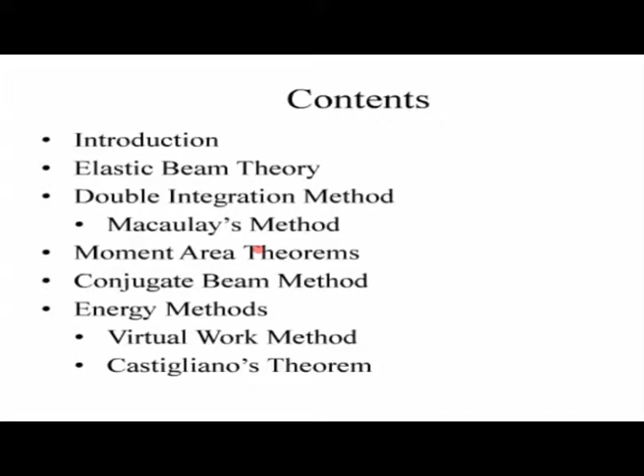Now, moving on with the introduction of this topic. First of all, why do we need to calculate structural deflections? Most often when we design structures, the first thing that comes into our mind is the strength of the structure, whether it is adequate. But in addition to paying attention to the strength of structures, it is also important to calculate the deflections.

There are various reasons for which deflections can occur in structures. Mainly, due to the loads, structures will deflect because no structure is practically or completely rigid. In addition to loads, deflections might be due to temperature changes in the structural members, fabrication errors, or settlement of the structural supports. These are the various reasons due to which a structure might undergo deflections. In order to ensure that our structure is stable and its integrity is maintained, we need to be able to calculate the deflections of these structures.

There are various other reasons for which we need to calculate deflections of structures. A number of structural materials, such as concrete, which are mostly used for civil engineering structures, are brittle, and hence they fail without giving much warning. Hence, it is necessary to prevent damage to these materials, and in order to do that, it is also necessary to calculate the deflection of such structures. Regarding serviceability, you need to avoid excessive deflections and vibrations in structures because it will render the occupants or users of those structures unsafe.

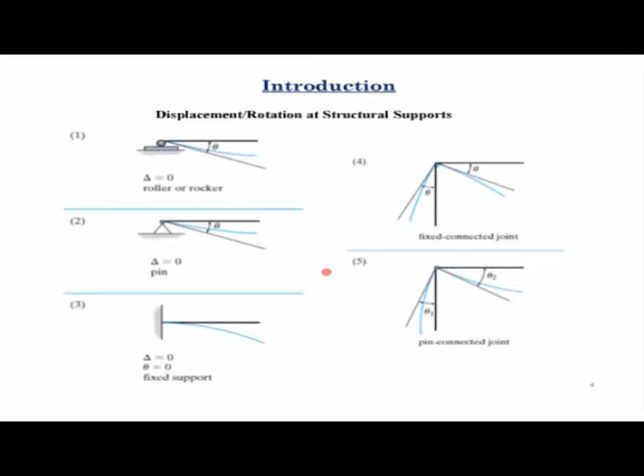Now, in order to calculate the deflections in structures, or displacement or rotations in structures, we need to be familiar with the various kinds of supports that these structures have. Some of the typical support conditions that are encountered in common civil engineering structures are shown on this slide.

The first one is like a roller or rocker support, which basically restrains the movement or displacement of the structure in only one direction, that is perpendicular to the support.

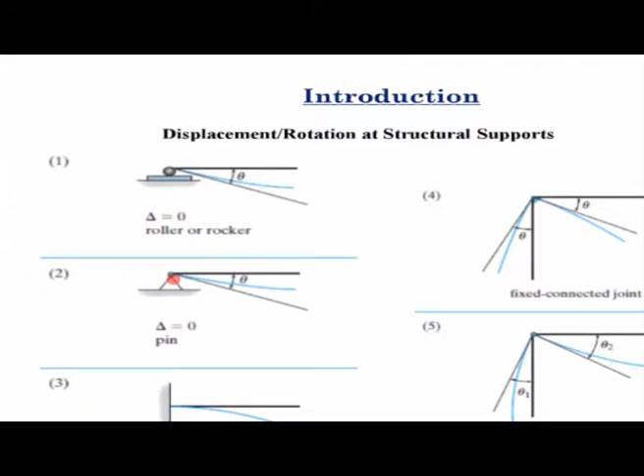The second one you see here on this slide is a pin support, which basically restrains the displacement of that structure at that point in all three directions.

The third support condition that we most commonly encounter in civil engineering structures is called a fixed support, which restrains the displacement as well as rotations at those supports.

And the fourth one you see here is a fixed joint connection, which is normally common in a frame member. In this fixed joint connection, the rotation of the two members which are connected at those joints are equal. In other words, the displacement at those joints or the rotation at those joints are allowed, but the rotations of those two members are equal.

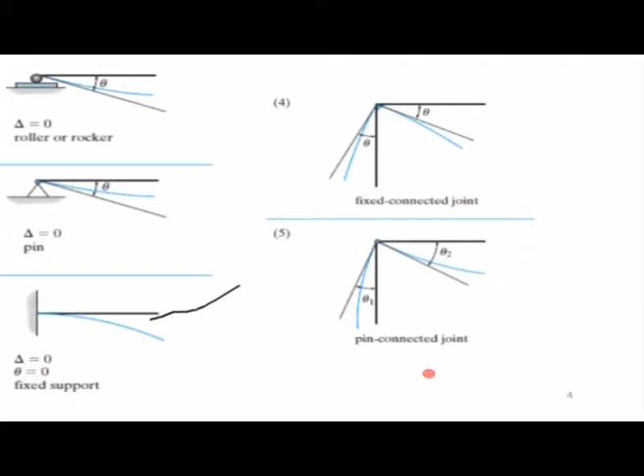Finally, the last connection that we encounter in civil engineering structures are the pin connected joints. In this kind of joint, the members are independent to move irrespective of the rotation or deformation of the other member. The two members which are connected are free to move by themselves.

Now, before I start with the first method of calculating deflection, I would like to give a small background about the elastic beam theory, based on which the first method, that is the double integration method, is developed. I'm sure that if you have taken any classes on strength of materials or solid mechanics, you have been familiar with this elastic beam theory, but I'll quickly recap.

However, it has been noticed that for members like structural beams, where the span to depth ratio is much higher, in other words the length is much greater than the depth, the deflections are primarily caused due to the bending internal forces, or the internal bending moments.

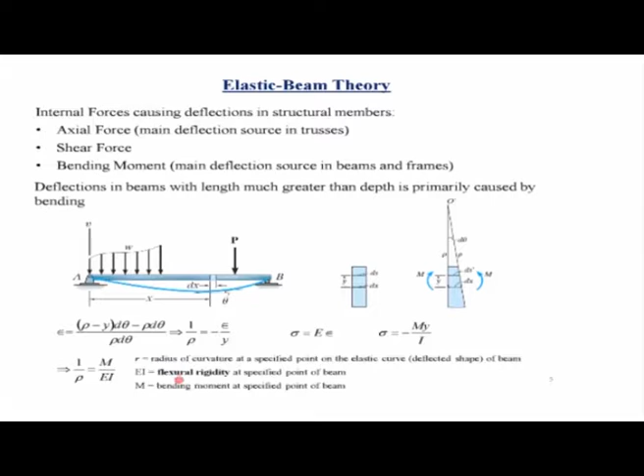Once again, looking back at that relationship, 1/rho equals M by EI. This dx is the length or width of that element, and that can be written as the radius of curvature times d theta. So here we have replaced 1/rho by d theta by dx, and taken dx to the other side, giving us d theta equals M over EI into dx.

Now if you remember from geometry learnt in class 12, the curvature is given by the second derivative of v with respect to x, over 1 plus dv/dx squared, whole to the power 3 by 2. In this study, we are considering small deformations, where dv/dx is basically the rotation of the beam element. For small rotations, dv/dx squared is much less than 1, so 1 plus dv/dx squared is almost equal to 1. So we can say 1/rho equals the second derivative of v with respect to x.

So when we substitute this here, instead of 1/rho, we write the second derivative of v with respect to x. We can say M by EI equals that second derivative. This basically relates the internal moment that develops due to applied loads with the deformation, that is the term v in this equation. Remember, this is the basic equation used to develop the three methods I'll discuss: the double integration method, the moment area theorem, and the conjugate beam method. In all three methods, this will be the starting point.

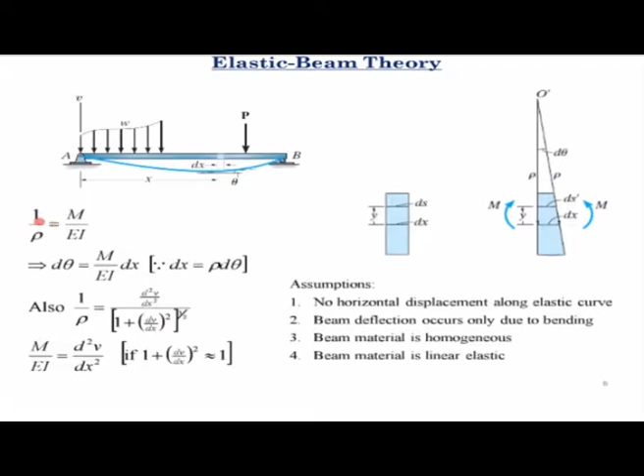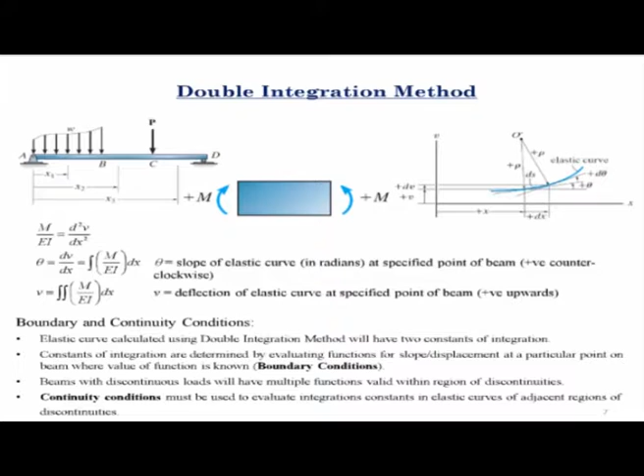So now we come to the double integration method, which is the first method for calculating deflection of structural members that I will discuss today. As I mentioned, the starting point is this second order deformation equation that we developed, that we saw in the previous slide: M by EI equals the second derivative of the displacement with respect to the distance along the length of the beam.

Now if you integrate both sides of this equation, you get dv/dx equals the integral of M by EI. Here dv/dx is the slope of the beam at any section. If you integrate both sides of this second equation, you get v. So integration of dv/dx is v, and you get the double integration of M by EI. This is the basic principle in this method, where you integrate the M by EI function of the beam twice to get the deflection and once to get the slope at any section. Theta is the slope of the elastic curve of the beam at any section, and v is the deflection.

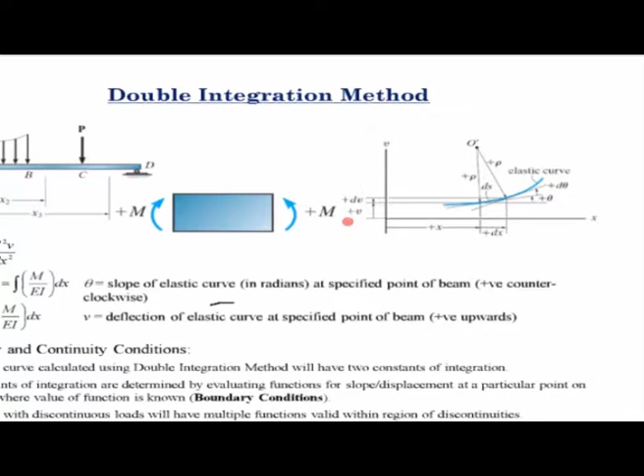Before I proceed further, I'd like to draw your attention to the sign convention we used for specifying theta and v. For the beam, we considered the distance towards the right as the positive x direction, and the deflection in the upward direction as the positive deflection v. For rotation, if it is counterclockwise, in other words if it's in the positive x direction and the deflection is towards positive v, then that rotation is considered positive. So this is the sign convention for positive rotation, and the vertically upward direction is the sign for positive deflection.

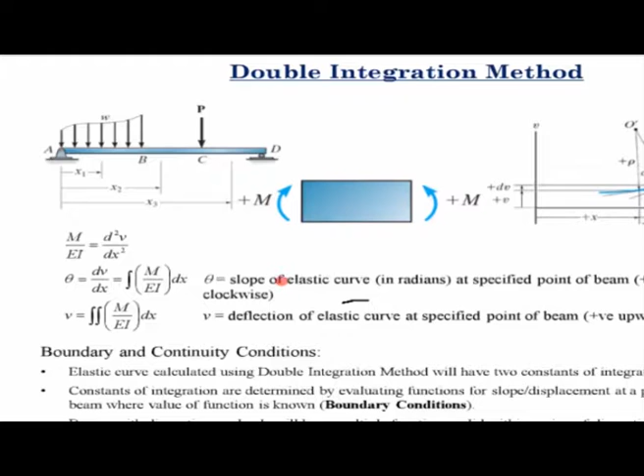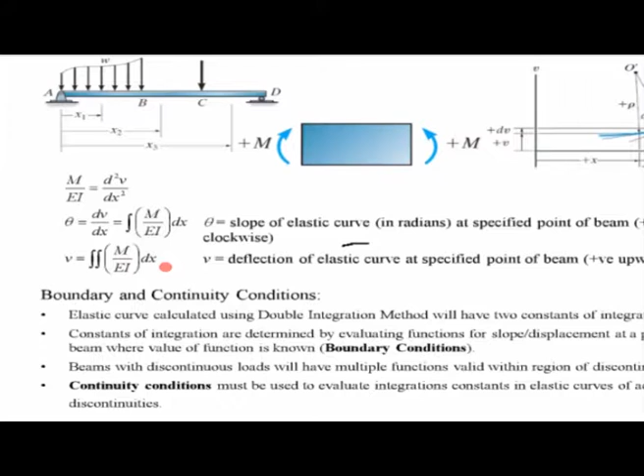Now coming back to the equation for this elastic curve, which is basically the deflected profile of the beam. We know that if we integrate the moment function of the beam, expressed in terms of x, where x is the distance from one end of the beam, what we get is some constant of integration on the right hand side. Those constants of integration have to be evaluated in order to calculate the deflection of the beam at any section, or to get the equation of that elastic curve.

So the elastic curve calculated using this double integration method will have two constants of integration. In order to determine these constants, we need to provide the values of either v or theta at some known points on the beam. In other words, those are known as the boundary conditions.

Beams with discontinuous loads will have multiple functions valid within the range of discontinuities, and the continuity conditions in that case must be used to evaluate the integration constants in the elastic curves of adjacent discontinuities. I'll have two examples which I'll show after this, and once we go through them, these points will be a lot more clear.

One of the prerequisites for this course was that the audience should be familiar with bending moment diagrams, shear force diagrams, and axial force diagrams of structures. So if any structure and any loading is given, you should be able to draw the bending moment, shear force, and axial force diagrams.

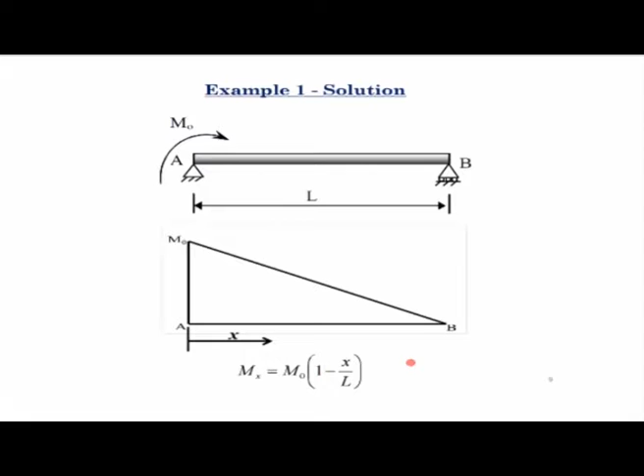Now in order to calculate the equation of the elastic curve, that is the displacement function of this beam at a distance x, using the double integration method, we write d²v/dx² = m/EI, and instead of m we replace it with m0(1 - x/L). If you integrate both sides of this equation, you get dv/dx on the left hand side, and on the right hand side you get (m0/EI)(x - x²/2L), plus a constant of integration c1.

If you integrate one more time, you get v = (m0/EI)(x²/2 - x³/6L) + c1x + c2. So these are the two constants of integration I was talking about in the previous slide. Whenever you try to get the deflection function of a beam using the double integration method, you will always encounter these constants of integration, which you have to solve using the boundary conditions.

Now for the boundary condition of this beam, it was a simply supported beam, so the deflections at both ends should be 0. At x equal to 0, the deflection v is equal to 0. If you put v equal to 0 at x equal to 0 into the last equation, you will get C2 is equal to 0.

The second boundary condition for this beam was at the other end, at end B, the deflection is 0. So at x equal to L, v is equal to 0. Come back to this equation, put x equal to L on the right hand side and set v equal to 0. If you solve it, you will get C1 is equal to minus m0L over 3EI.

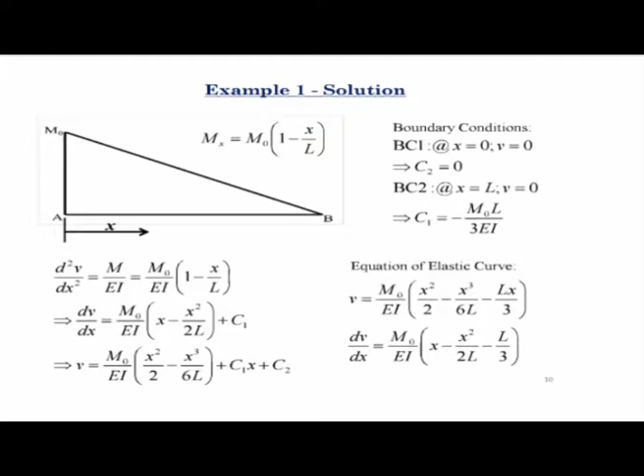So that is what we have done in this slide. In order to determine the location at which the maximum deflection occurs, obtain the value of x at which the first derivative of the elastic curve equation is equal to 0. Take this first derivative equation and equate it to 0, giving x minus x squared by 2L minus L by 3 equal to 0. This is a quadratic equation, and solving it gives two values of x: one is x equal to 0.422L and the other is 1.56L.

That value of x must be within the range of 0 to L, so x cannot be 1.56L. In other words, this equation for the elastic curve will have either a maximum or minimum value at 1.56L, but for this problem it is not applicable because it is not within the range of applicable values of x. So x equal to 0.422L is the location at which the maximum deflection will occur.

Next, you have to obtain the maximum deflection. Come back to the deflection equation and put x equal to 0.422L into it. If you solve it, you end up with minus 0.064 m0L squared by EI. This minus sign indicates that this is in the vertical downward direction. Remember the sign convention for deflection: deflection in the vertically upward direction is positive. So once it comes out negative, that means it is in the vertically downward direction. That is about the maximum deflection of the beam.

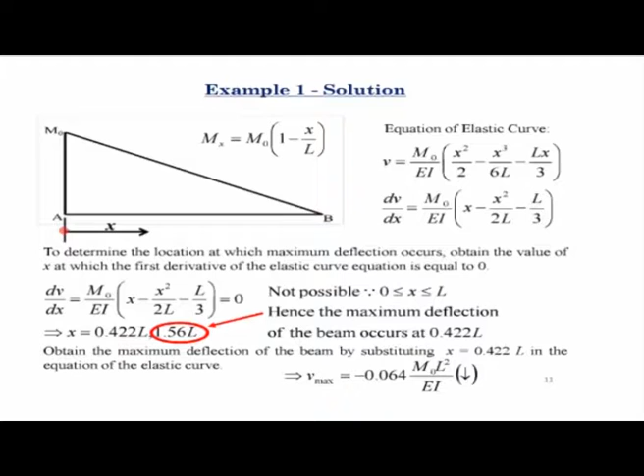It is minus 0.064 m0 L square by EI. So minus indicates it's in the downward direction, and this maximum deflection will occur at a distance of 0.422 L from the left end of the beam.

Now for the maximum slope, what we do is we take the derivative of this dv/dx, we take the double derivative, so it is d2v/dx square. If you equate that second derivative to 0, you will get x is equal to L. Now if you put x equal to L in this equation, you get the slope is m0 L by 6EI. So that is the slope at the beam at x equal to L.

But there is one thing that you should be careful about, which I will now talk about: this is one of the drawbacks of the double integration method. You always cannot take the higher order derivative and equate it to 0 and get the location of the maximum slope or deflection. In this case, what you get is a positive rotation at the right end, that is at x equal to L, and that is m0 L by 6EI.

However, if you come back to this equation for the slope of the beam, which is dv/dx equal to m0 by EI times x minus x square by 2L minus L by 3, and in this equation, if you put x equal to 0, that means at the end A of the beam, you will see that dv/dx at x equal to 0 is minus m0 L by 3EI.

So what does this indicate? This indicates that at this end, it is having a negative slope, that means it is in the clockwise direction at this end. And notice that the magnitude of this slope at the left end is higher than the magnitude of the slope at the right end. So this is basically to remind you, or to show you, that you should always calculate the deflection at the support condition in addition to the deflections or rotations that you get from the equation of the elastic curve.

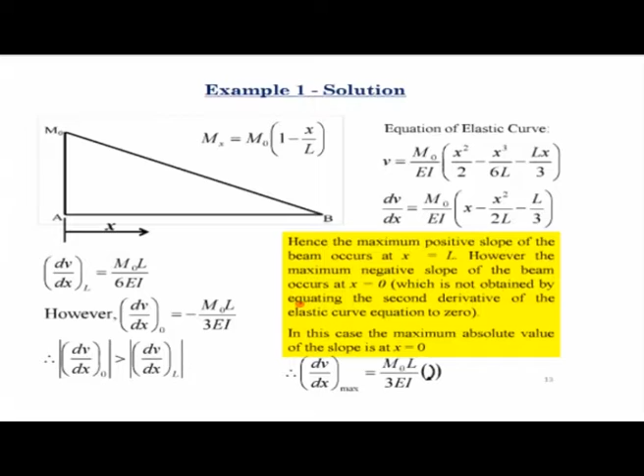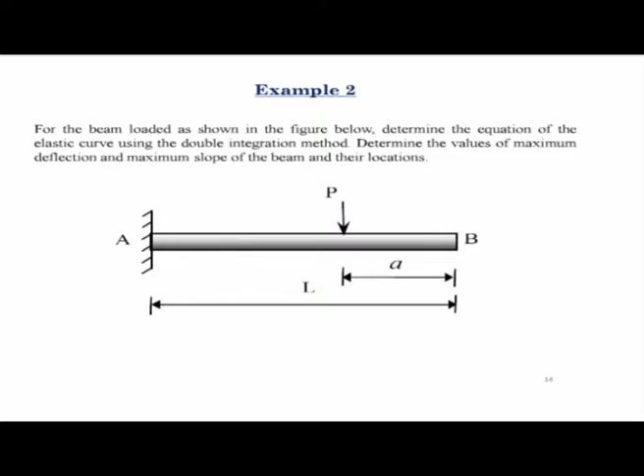Now in this case, you see that if you draw the bending moment diagram of the beam, this is what it will look like. At the fixed end, the moment is minus P times L minus A. And at a distance of L minus A from the left end, the moment is 0. Beyond that, the moment remains constant. So this is the bending moment diagram.

So now here notice that the bending moment, if you write the moment function, it will have two equations. For x between 0 to L minus A, it is minus P times L minus A minus x. And when x is greater than L minus A and less than L, the moment is equal to 0.

Now, to solve for the elastic curve of this beam using the double integration method, there are two sets of moment functions that we have to consider. One is valid for x greater than 0 and less than L minus A, and the other one for x greater than L minus A and less than L.

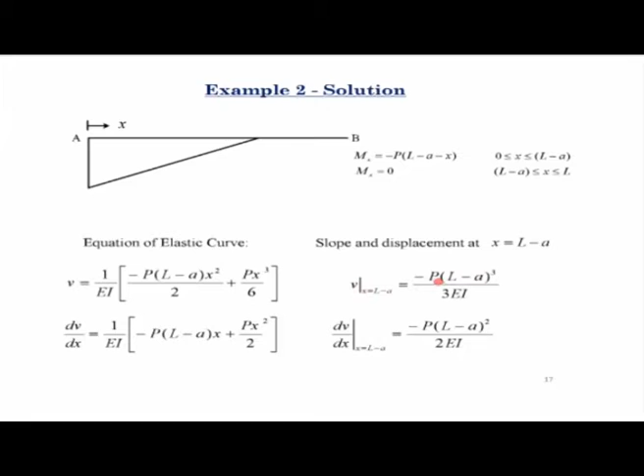And also at x is equal to L minus a, the deflection is minus P(L minus a) cube by 3EI. So these are the two boundary conditions that we are using to solve the constants of integration for the second part of the beam.

So if you put those constants of integration back into the equation, you will get v is equal to, instead of c1, minus P(L minus A) square by 2EI times x, plus c2 which is P into (L minus A) whole cube by 6EI.

And also the slope of the elastic curve of that beam is given as dV/dx equals C1. So C1 is minus P(L-A) squared by 2EI. This is the equation of the slope and deflection for this portion of the beam.

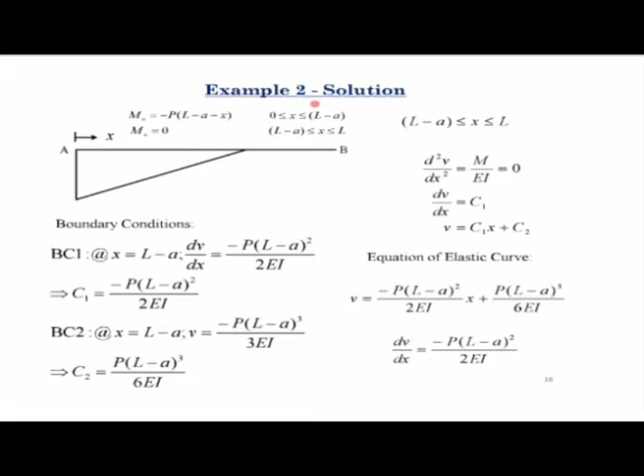This slide summarizes the slope and deflection equations for both regions of the beam. This is for the first part, between 0 and L-A, and this is for the second part. These are also the equations for the slope of the beam, one for x between 0 and L-A, and the other for x between L-A and L.

Now in this problem we also had to calculate the maximum slope and maximum deflection of the beam. Looking at the slope and deflection expressions for x between 0 and L-A, both contain terms of x. So if x is 0, the deflection is 0, and the slope is 0. As x increases, the deflection and slope keep increasing, so this gives the maximum value of slope and deflection at x equals L-A from these two equations. Now coming to the other two equations,

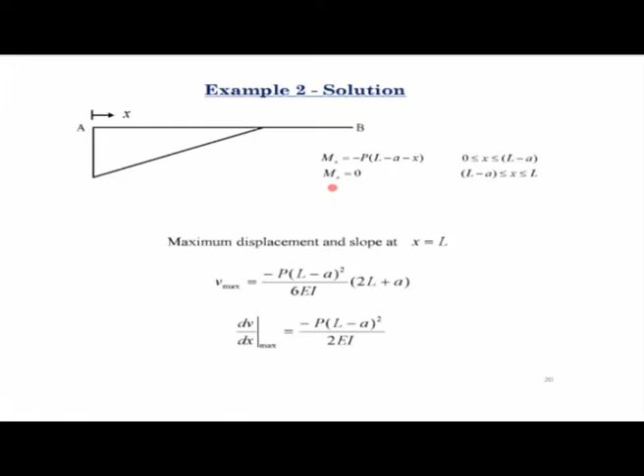Based on our observations from these two examples, I have highlighted some points about the double integration method that I want you to keep in mind. First, the double integration method can be used to directly obtain the slope and deflection at any point along the span of a beam from the equation of its elastic curve. So if you have the moment function of a beam along its span, you can use it to calculate the slope or deflection at any point by the double integration method.

However, there are some drawbacks, which I mentioned and will highlight again. Beams with discontinuous loads will have separate moment functions applicable to individual regions of discontinuity. We saw in the second example that even though there was no moment function for the region of the beam between L-A and L, we had to consider a separate set of equations and find two separate constants of integration in order to get the equation of the elastic curve for the entire beam.

Continuity conditions must be used to evaluate integration constants in elastic curves of adjacent regions. Recall the second example: we first found the equation of the elastic curve for the region from x equal to 0 to L minus A, then used that equation to obtain the slope and deflection of the beam at x equal to L minus A, which served as boundary conditions for the equation of the elastic curve between L minus A and L.

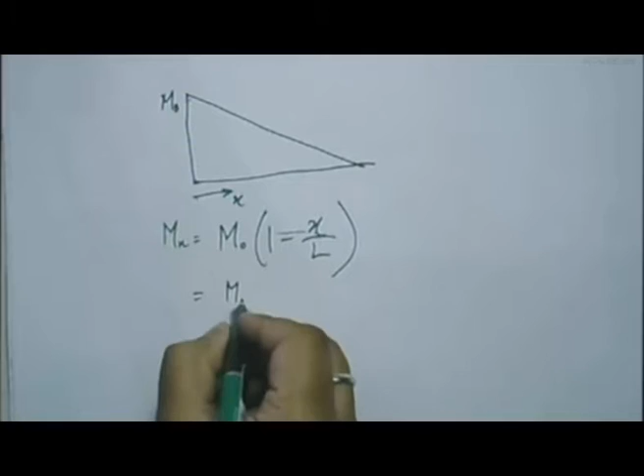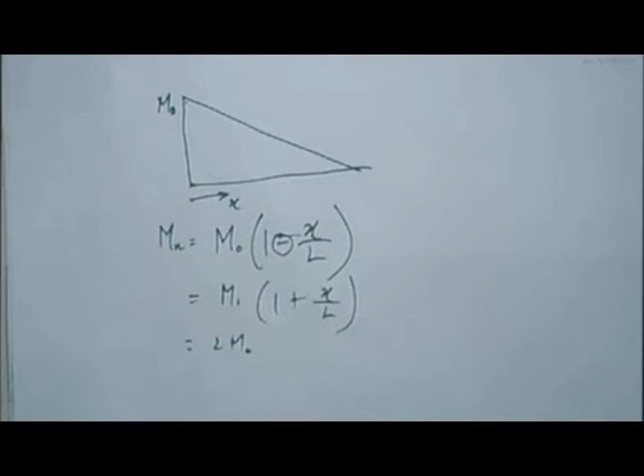Sir, in example number 1, we have m(x) equal to m0(1 minus x/L), but when I solve it I get m0(1 plus x/L). Why is there a minus sign? If you look at the bending moment diagram of that beam: this is x, and at x equal to 0, the value of the moment is m0. The equation I got is m(x) equal to m0(1 minus x/L). At x equal to L, the value of moment is 0 — if you put x equal to L, you get 1, so 1 minus 1 makes it equal to 0. Now if you say it is m0(1 plus x/L), then at x equal to L you would get 2m0, but it's basically reducing, it's negative — that's why you should have the negative sign there. Is that clear? Yes sir, I got the answer, thank you.

Another question through the chat asks why we assume the beam is linearly elastic. The reason is that if we do not assume the beam to be linearly elastic, then in the equation d2v/dx2 equal to M/EI, the E term is not constant. So if the beam is not assumed linearly elastic, that equation, which is the basis of our method, is not applicable. That is the main reason this method is applicable for linearly elastic materials or beams.

There's another question asking how to find slope and deflection for continuous beams. Before starting this lecture, I mentioned this method is for statically determinate beams. So if you have a continuous beam which is statically determinate, and there is a support somewhere in between the span, you simply apply the support conditions at that point into the equation of the elastic curve to evaluate the constant of integration. At the point where the boundary condition is imposed, apply it into the equation of the elastic curve, and you should be able to solve for the deflection and slope of that beam even though it is continuous.

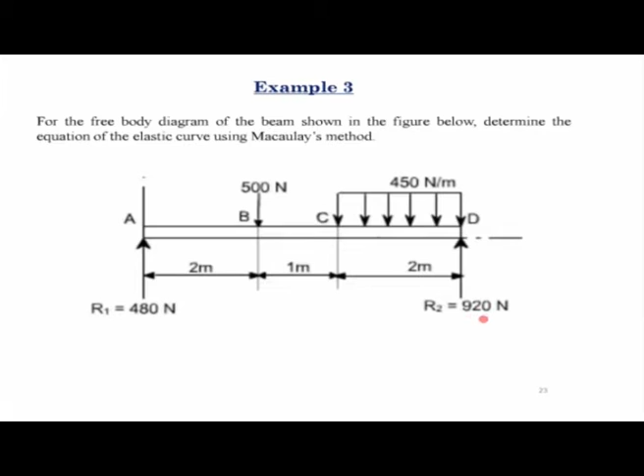Now, if you want to write the moment function for this beam, it has load discontinuities at point B and C. So what happens is, between A and B, there is one equation for the moment function.

So for x between 0 to 2 meters, the moment function is given by the reaction 480 times x. For this region between B and C, that is for x greater than 2 and less than 3, the moment function is given as 480x minus 500 times x minus 2. So that concentrated load, which is at a distance of 2, comes into the picture here for the moment equation between B and C.

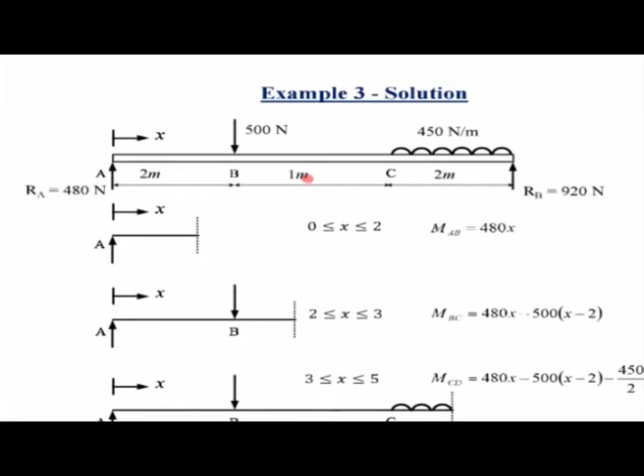Now, if you look at the third region, that is between C and D, the moment function is given as 480x minus 500 times x minus 2 minus 450 by 2 times x minus 3 whole square. So now in this region, even the uniformly distributed load of 450 Newton per meter comes into the picture.

So now you see that if you want to solve this by the regular double integration method, you will have 3 different sets of moment equations. You will have 6 constants of integration that you have to evaluate in order to be able to obtain the elastic curve of this beam.

So now what we'll do is we'll see how we can solve it much easier using the step or singularity functions by the Macaulay's method. This is the equation of that beam. The second order equation of the elastic curve of the beam can be written as a single equation using the singularity functions as shown below.

So instead of, if you go back, for this region it is 480x, but for this region it is minus 500 times x minus 2. Now if you put this in box brackets, or if you use singularity functions, then you can use this second term in the same equation.

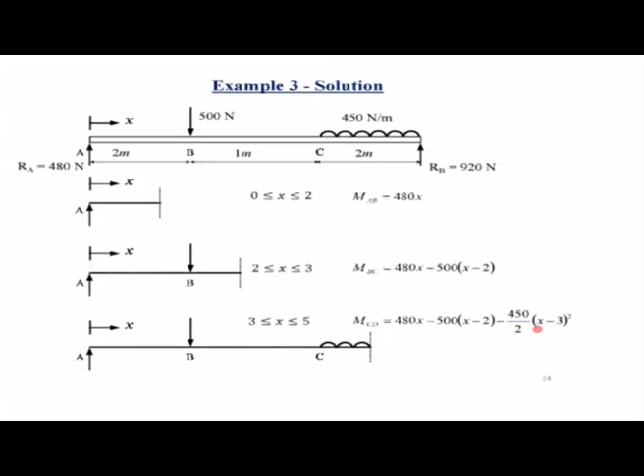Similarly, if you put this x minus 3 within the box bracket, that means when x is less than 3, this term becomes 0. When x is greater than 3, then it is applicable. So that is what we do here. We use the singularity functions to express the moment equation of that beam, and then we put it in the second order equation of the elastic curve.

So EI d2v dx square is equal to 480x minus 500 times x minus 2, this is a singularity function, minus 450 by 2 into x minus 3 whole square, again this is a singularity function.

Now, if you look at the properties of integration of singularity functions, and if you integrate on both sides, you will get EI dv dx is equal to 240 x square minus 250 times x minus 2 whole square. So now notice, if you integrate this singularity function, you get x minus 2 whole square by 2, so that 2 is cancelling this 500, and you get 250.

Same thing here, 450 by 2 times x minus 3 whole cube by 3, so that 3 and 2 in the denominator cancel this out and you get 75. So this is the first order equation of the elastic curve.

EI dv dx is equal to 240 x square minus 250 times x minus 2 square within this singularity function, and minus 75 times x minus 3 cube, plus, again like we do in the double integration method, we also have a constant of integration C1 here.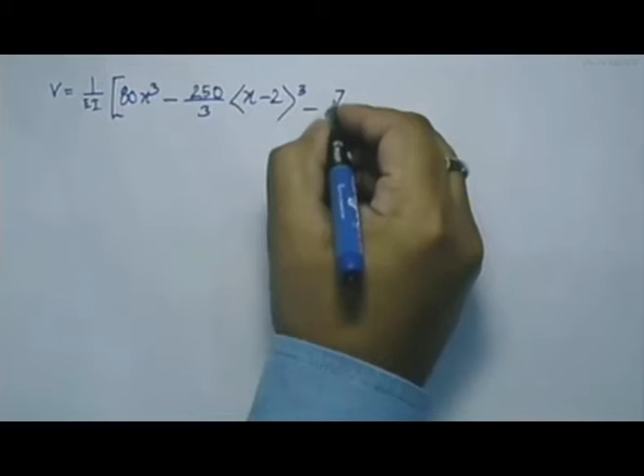80x cube minus 250 by 3, the singularity function of x minus 2 whole cube, minus 75 by 4, singularity function of x minus 3 to the power 4, minus 1490. So this is the equation of the elastic curve using the singularity function.

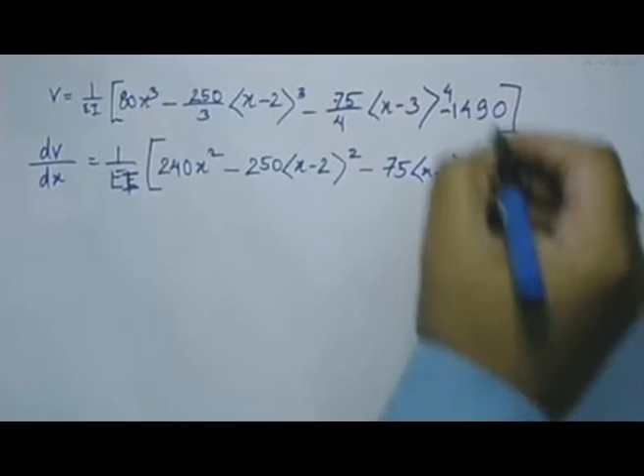Now if I want to calculate the maximum deflection of that beam, I can say dv/dx, which is equal to 1 by EI, this will become 240 x square minus 250, x minus 2 whole square, minus 75, x minus 3 to the power... I'm sorry, there should be an x here, C1x minus 1490.

Now if you straight away equate this to 0, what happens to these singularity functions? You cannot just ignore them or use them directly for calculating the values of x. So what we have to do is, just like in the double integration method, we have to separate it into 3 different regions.

So for x between 0 to 2 meters, the dv/dx will be 1 by EI, 240x square minus 1490. Now you equate this to 0 to get the location of the maximum deflection.

If you equate this to 0, you will get x is equal to 2.49 meters. Now, notice that this part of the equation I wrote is valid for x between 0 to 2, and by solving this, you are getting x is equal to 2.49. So it is not applicable at x equal to 2.49.

So the maximum value of the deflection cannot be obtained at x equal to 2.49. In other words, the maximum value of the deflection does not occur between x equal to 0 and x equal to 2. So now what we do is we take the second equation.

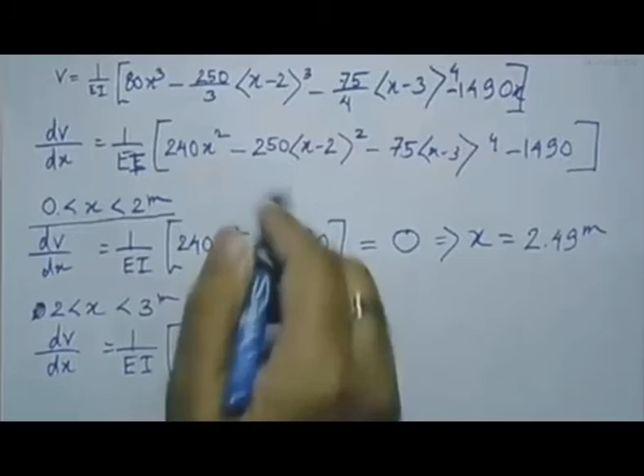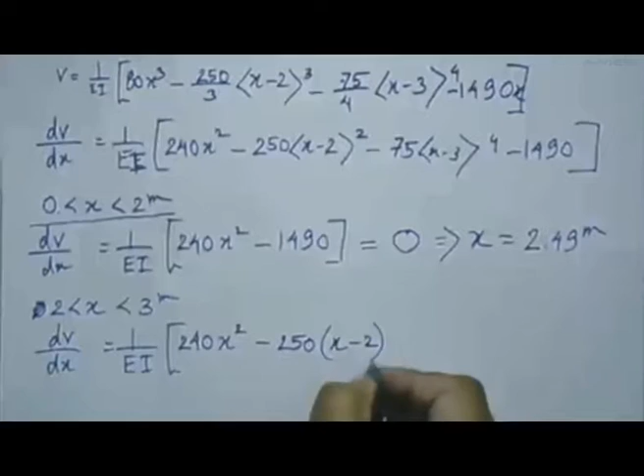So for x between 2 meters and 3 meters, dv/dx can be written as 1 by EI times 240x squared. Now the second term will come into the picture, minus 250 times x minus 2 whole square. Since x is greater than 2, you can write it using the round bracket. Minus 1490, this term is still not applicable, it's only applicable for x greater than 3, but right now x is between 2 and 3.

Now if you put this equal to 0, you will get a quadratic equation. If you expand the x minus 2 whole square and rewrite it, you will get 1 by EI times minus 10x squared plus 1000x minus 2490 equal to 0. If you solve this, you will end up with two values of x. This is a quadratic equation, so solving it gives two values of x.

I have already solved it for your convenience. You get x equal to 2.55 meters and 99.5 meters. The second value is not applicable because for this equation, the limits of application are between x equal to 2 and x equal to 3. The first solution, x equal to 2.55 meters, is between 2 and 3, so this solution is applicable in this equation.

So to calculate the maximum value of v, you put x equal to 2.55 meters into the equation and solve it, you will end up with minus 2487 by EI. So this is one of the maximum values of the deflection. Here you are getting a negative value, which tells you that the maximum deflection is in the downward direction.

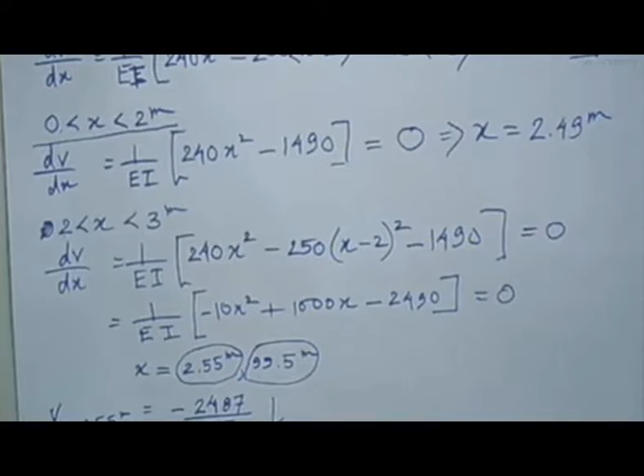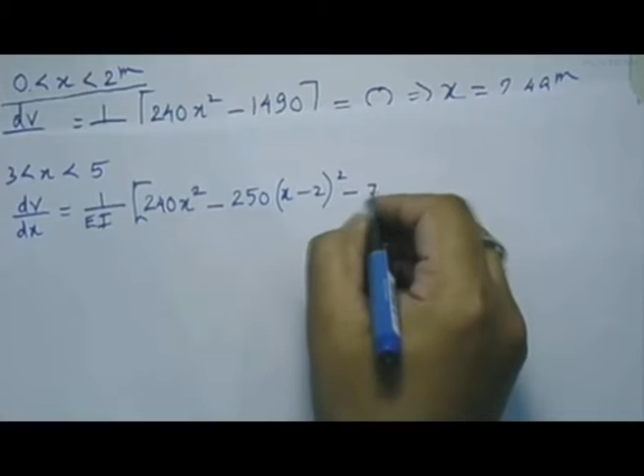Now this is the second set of equations. There will be another, third set of equations valid for x greater than 3, less than 5, and for that the equation will be dv/dx equal to 1 by EI times 240x squared minus 250 times x minus 2 whole square minus 75 times x minus 3 to the power 4, minus 1490. Notice that even the singularity function at x equal to 2 and the singularity function at x equal to 3 both come into the equation, and both have been replaced by round brackets.

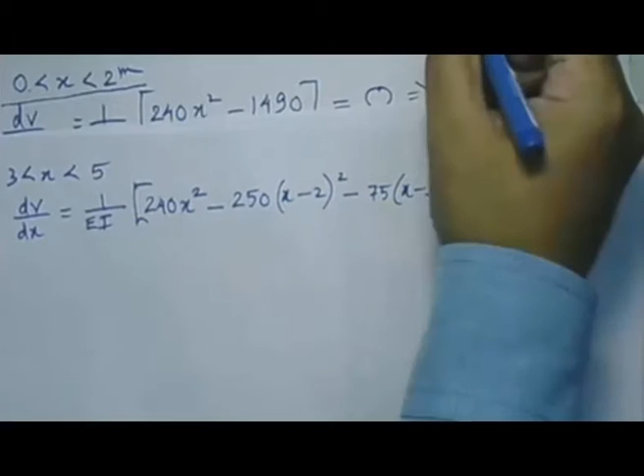So if you equate this to 0, this is a cubic equation. Sorry, this should be a cubic equation. So if you solve this, you will get three values of x. The values you get here are minus 0.36 meters, 2.54 meters, and 6.68 meters.

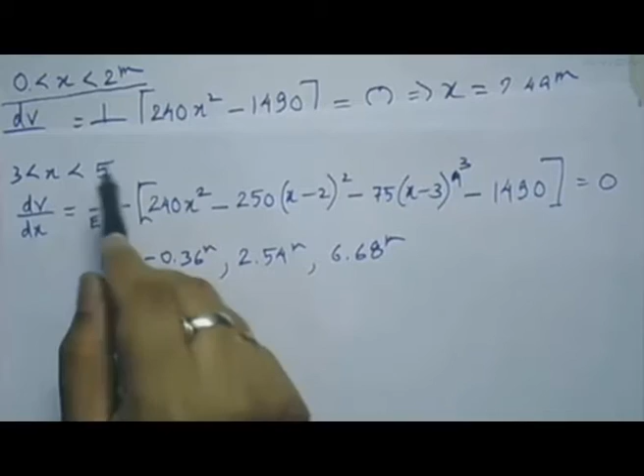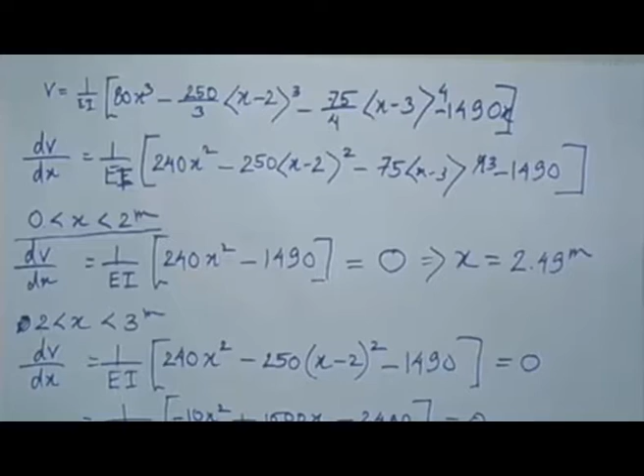So this is one example that I wanted to discuss with you all, to show one of the limitations. Even if you are able to obtain the equation of the elastic curve, that is the slope equation and the deflection equation, by solving a single equation, if you have to calculate the maximum slope or the maximum deflection of the beam using this method, you will have to again consider the separate equations which are applicable for each region of continuous loading, just like you do in the double integration method.

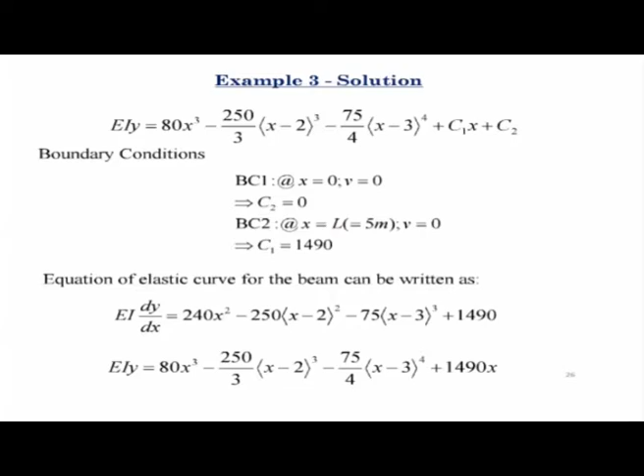So these are some of the highlights of Macaulay's method. First, it is used to directly obtain the equation of the elastic curve of a beam with discontinuous loads by using a single moment equation with singularity functions. Just like you saw in the example, if you had solved that example number 3 using the direct integration method, you would have solved 3 different sets of equations and 6 constants of integration. But because you solved it using Macaulay's method, you just had to solve only one equation and 2 constants of integration. So it is definitely more convenient for calculating slope or deflection at any point over the span of a beam with discontinuous loads.

However, evaluation of maximum slope or deflection from the equation of the elastic curve requires consideration of separate equations without singularity functions. So if you looked at that example I showed, and how to calculate the maximum deflection of that beam, for that you again have to consider the 3 separate regions: one between x equal to 0 to 2, the other between 2 to 3, and the last one for 3 to 5.

Now again, just like the double integration method, this is not applicable for calculating slope or deflection of beams with complicated loading and support conditions, and also it is not applicable for members having significant deformations due to axial and shear forces. So that is all I had to present about Macaulay's method.

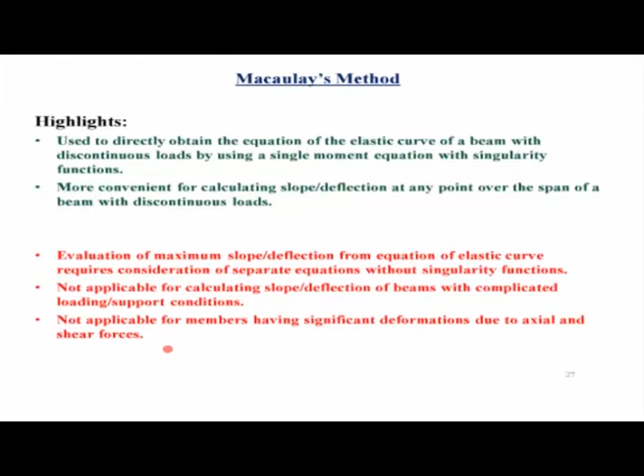Now if you all have any questions about Macaulay's method, I would like to take them right now.

Okay, I got a question here: which method is feasible to find slope and deflections for nonlinear elastic and inelastic structures? If you are dealing with nonlinear elastic and inelastic structures, this direct integration method may not be applicable or may not be convenient to use. The best option I can think of is to use some finite element analysis, which might be helpful for solving slope and deflection of structures with inelastic components.

When there is STAAD.Pro, why are we using these traditional methods? Which one is more accurate?

Okay, now this is a good question. When there is STAAD.Pro, why are we using these traditional methods? This is just to make you all familiar with the theories, because if you get a software, it is always convenient to use, but at the same time, it is also important for you to be familiar with the theoretical knowledge used to develop these softwares. Otherwise, if you make some mistakes while using a software, it will be very difficult for you to figure out the reason why. So using a software is always welcome and encouraged. You should be familiar with different kinds of software, but also familiar with the basics behind them. If you are not familiar with those basics, you might be using the software as a black box.

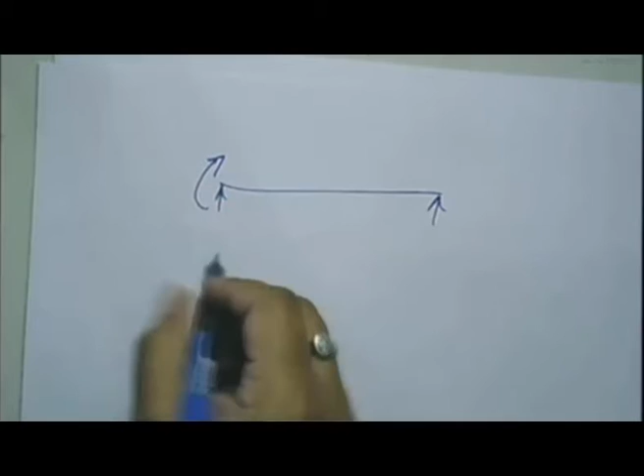If a moment is acting at a support, how do you use Macaulay's method to find slope and deflection? First you find the moment function of the beam. If you look at the first example I talked about, where I had a moment acting at the support, and you draw the moment diagram of that beam, the moment function is continuous—there is no discontinuity. So in this case, you don't even need Macaulay's method. You just find the moment function or moment equation over the length of the beam and directly use it in the double integration method. You don't need Macaulay's method for this beam.

The next question is why Macaulay's method cannot be used for member deformation due to axial force and shear load. The basic principle behind Macaulay's method or double integration method is elastic beam theory, which considers the deformation of members due to bending moment, but does not consider deformation due to axial force and shear load. That is why Macaulay's method or double integration method cannot be used for calculating member deformation due to axial load and shear forces.

The next question is, can we predict directly the approximate place of maximum deflection without going through all those individual sections? I'm not sure if you're asking about the example that I discussed.

If it is about example 3 that I was talking about, yes, we can look at the beam and definitely say that the maximum deflection would be somewhere near that concentrated load. But to find the exact location and the value of that maximum deflection, we need to go through the exercise where you take the first derivative, equate it to 0, find the location, and put that location back into the equation of the elastic curve to get the maximum deflection.

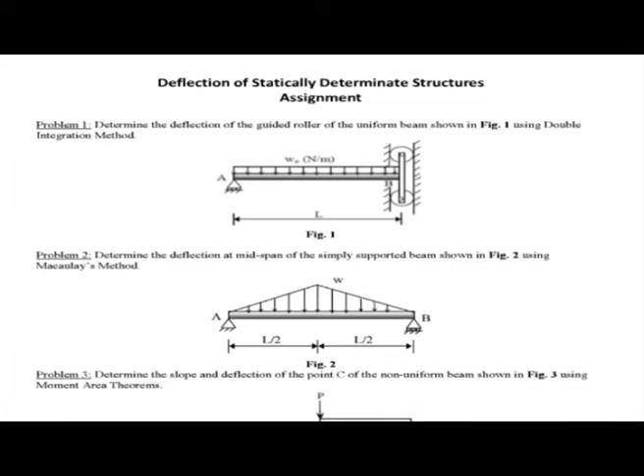So these are some of the assignment problems I gave for this lecture. The first one is a double integration method problem. What I have here is a beam with a pin support at one end, and a support at end B which is fixed but not restrained in the vertical direction—there are rollers by which the beam can move vertically at end B. I won't be doing the detailed solution of this problem.

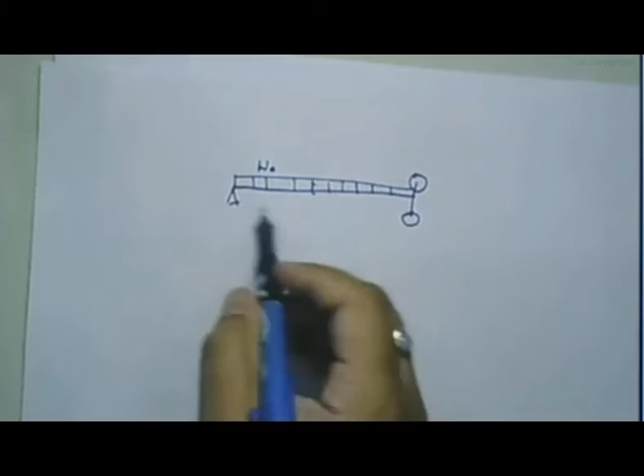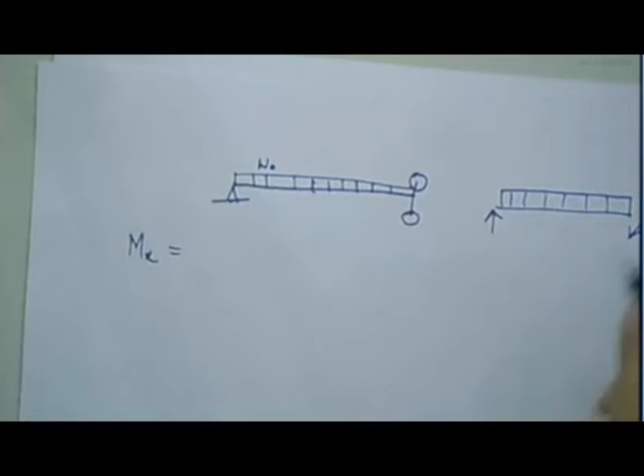If this beam is subjected to a uniformly distributed load w0, there is no discontinuity in loading, so we can easily use the double integration method. To write the equation of the moment function, first you should draw the free body diagram. If you draw the free body diagram, you'll get a reaction here and a moment. This is w0, and this is the length of the beam.

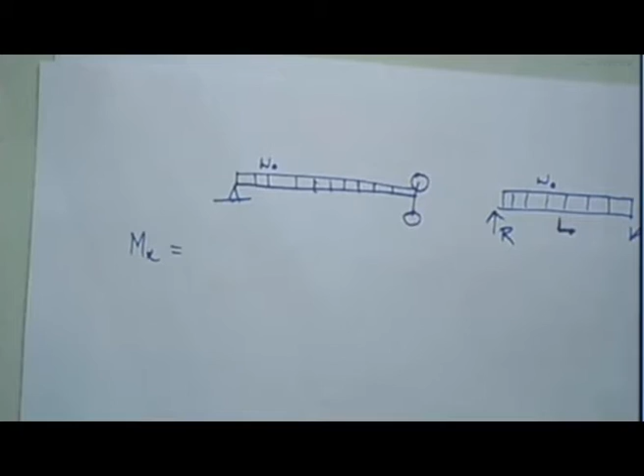So if you apply the equation of static equilibrium to this beam, summation of vertical forces equal to 0, you'll be able to solve for the reaction, which will be equal to omega 0 L, and the moment would be equal to omega 0 L squared by 2.

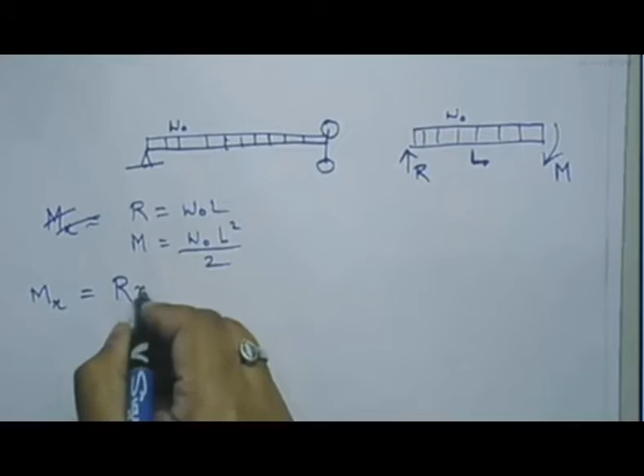Now, to solve this beam using the double integration method, you have to write the moment function. For that, it will be R times x minus omega 0 x squared by 2. So this is the moment function that you have to use.

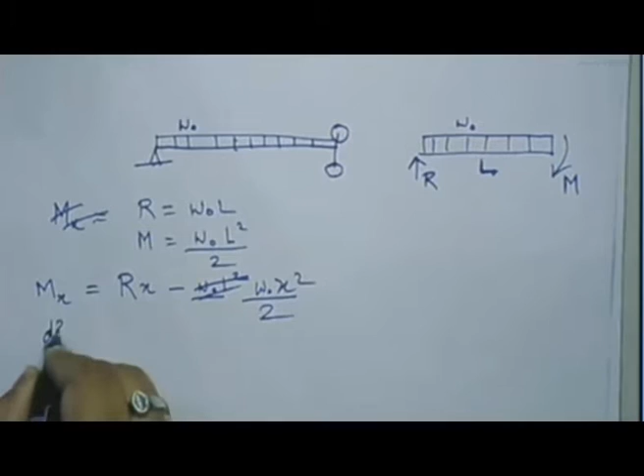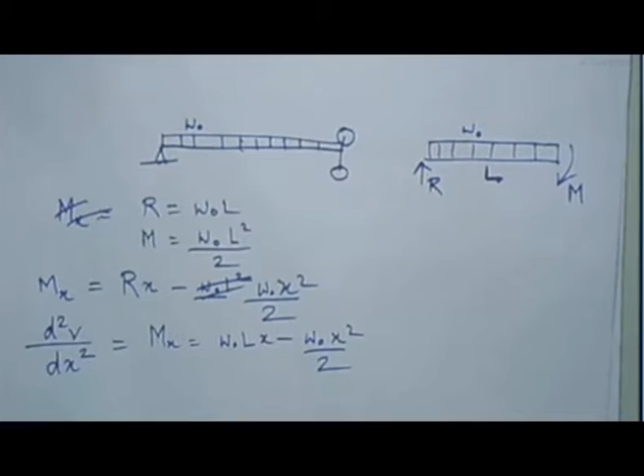Now you do the double integration, so you write d2v/dx squared is equal to Mx. In this case, it is omega 0 L x minus omega 0 x squared by 2. Now you can use the double integration method to get the expression—and what we've missed here is 1 by EI.

If you solve for this, you'll get some expression in x, and two constants of integration, C1 and C2. How do you solve for C1 and C2? What are the boundary conditions in this beam? The boundary condition would be at x equal to 0, V is equal to 0, because it's a roller support at the left end. And the second boundary condition would be at x equal to L, the slope of the beam would be 0.

If you look at this beam, here it can move vertically, but it is fixed into this rod. So because of that, it will not have any rotation at this end. So it will be dV/dx equal to 0.

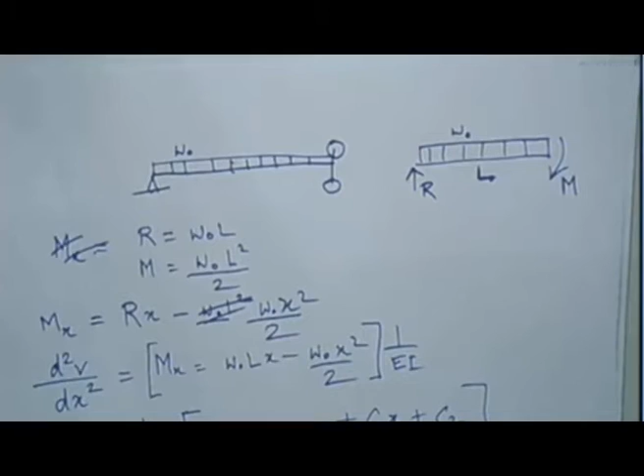Once you get these two boundary conditions and apply them into the equation of the elastic curve, you will be able to calculate these two constants of integration, and thereby get the equation of the elastic curve. So this is the first problem of the assignment.

So that was the first problem. Now there is the second problem in the assignment, which also answers a question some of you had: determine the deflection at the midpoint of the simply supported beam using Macaulay's method.

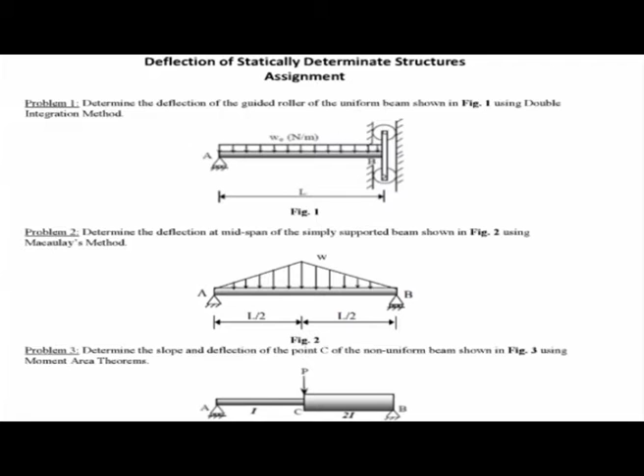You have a uniformly increasing load, going from 0 up to W at the center of the beam, and then it decreases again. So the question someone asked was, what do we do if we have a uniformly increasing load?

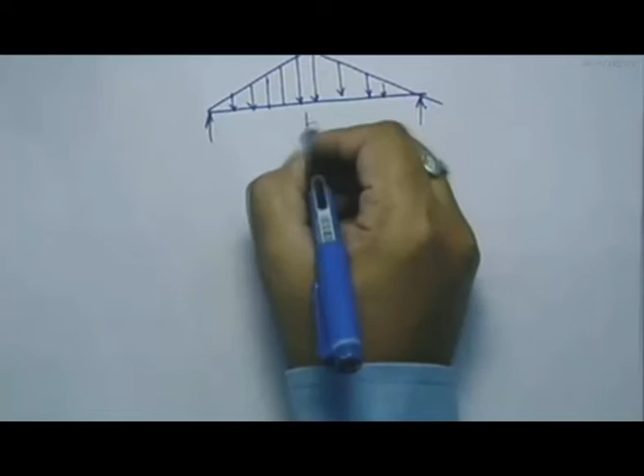So this is the uniformly increasing load. First, you have to calculate the reaction. If the length is L, the total load on the beam is half of omega times L, so the reaction at each support would be omega L by 4.

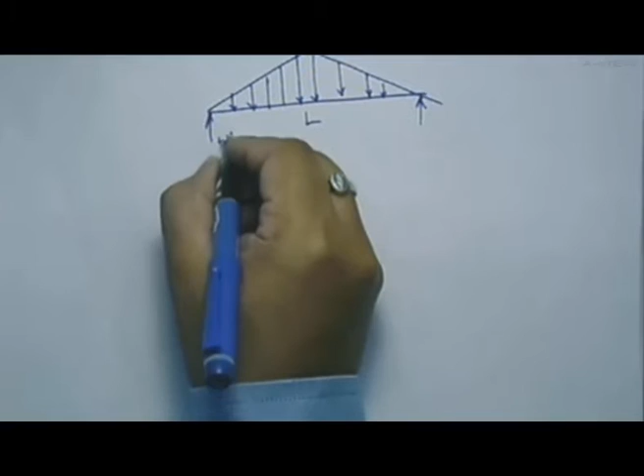To write the equation of the moment function, it will be omega L by 4 x minus omega by L by 2 into x. At a distance x, this value is omega by L by 2 into x, so this into half into x into 1/3 x. This equation is valid for x between 0 to L by 2.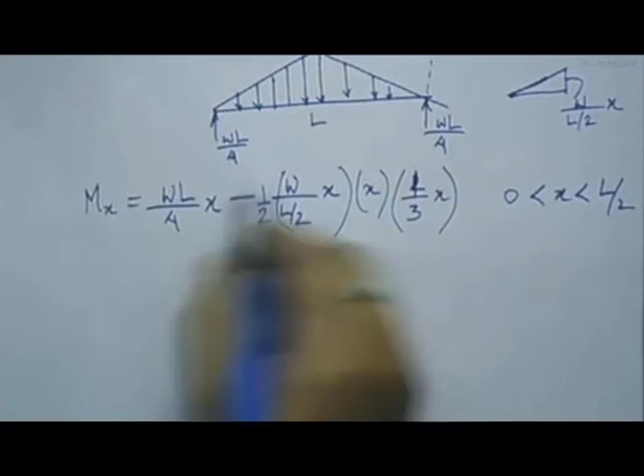If it had increased continuously over the entire span of the beam, this equation would have been applicable for the whole beam. So that basically answers the question: if it were a uniformly increasing load, this equation would be valid for the entire beam.

Now since there is a change in the slope of the loading, going from uniformly increasing to uniformly decreasing, we have to use Macaulay's function. How do we apply Macaulay's function?

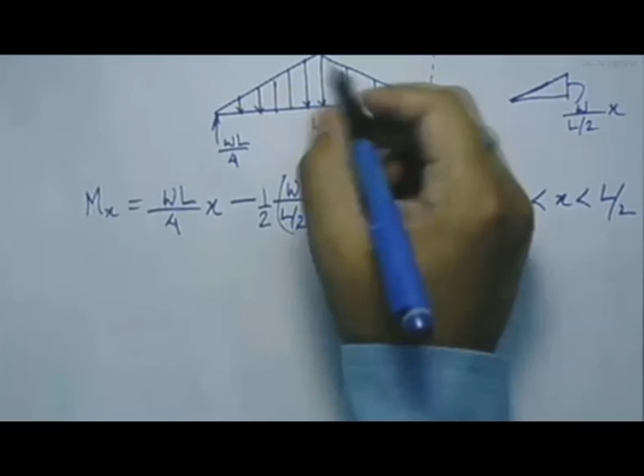What we do is first assume that this uniformly increasing load is over the entire span, so this equation applies for the entire range of the beam. However, over the region between L by 2 and L, we assume there is a load acting in the upward direction, such that the summation of these two loads equals the original load.

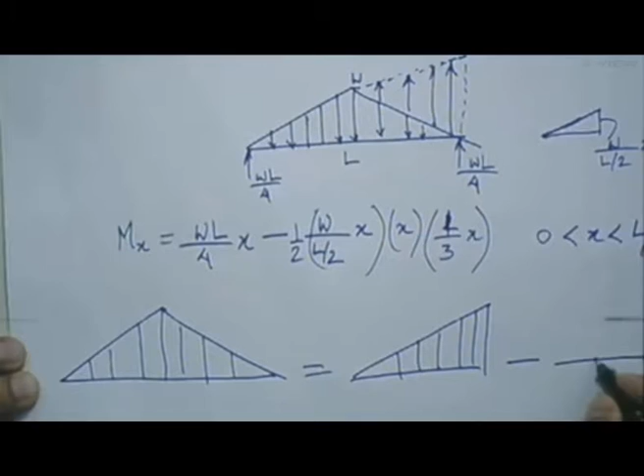So if I draw it again, this loading can be considered equivalent to this loading minus, or plus, applying a load in the upward direction. This is L by 2, this is L by 2, and this is L. If this is W here, at the midpoint it is W, so here it is 2W, and this is also W.

Now if you want to write the moment function of this beam, what do you get? For this there will be reactions R1 and R2, and for this case it will have reactions R1 dash and R2 dash. So the total reaction would be R1 plus R1 dash, which equals the reaction due to this loading, omega L by 4.

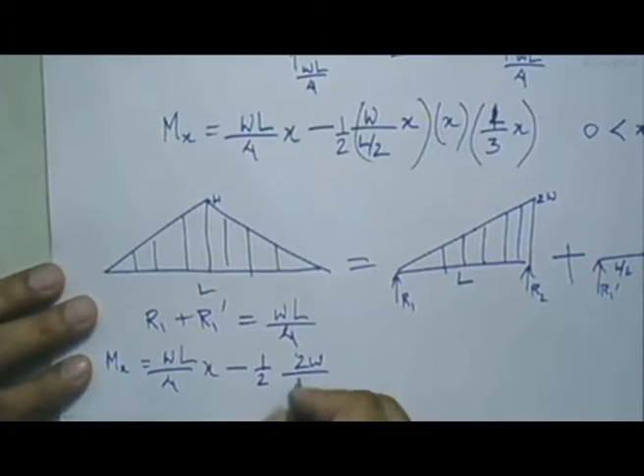So the moment equation for this beam will be omega L by 4 x minus half of 2 omega by L x into x by 3, plus you have to consider this part, which is 2W by L by 2, or here it will be x minus L by 2 into x minus L by 2 into x minus L by 2 by 3.

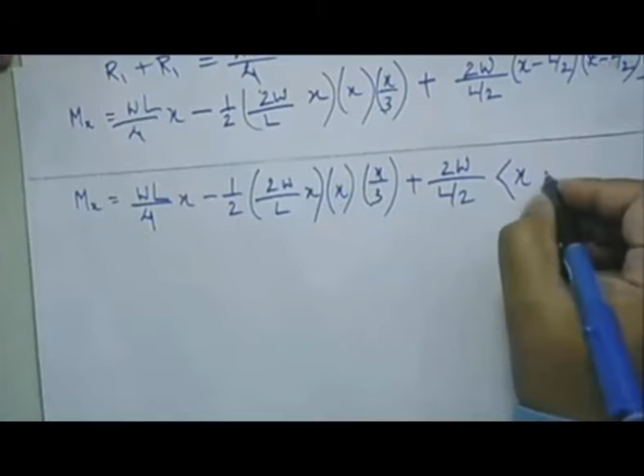Now this term is only applicable for the portion of the beam between L by 2 and L. So what we do is use the singularity function for that part: omega L by 4 x minus half into 2 omega by L x, x into x by 3, plus 2 omega by L by 2 into, now this is where the singularity function comes into the picture, cube by 3.

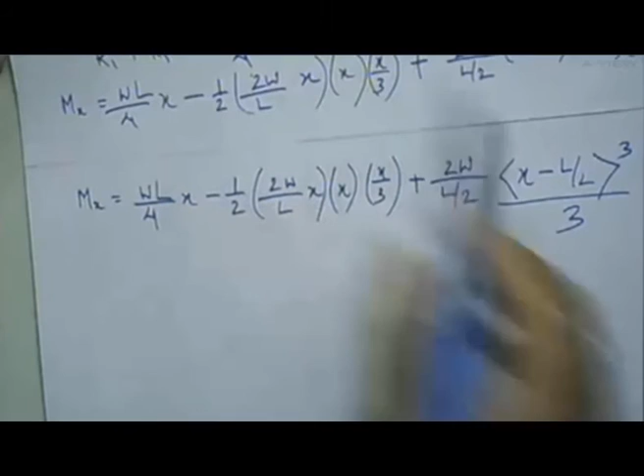So this is the one equation that represents the moment function of the entire beam. Here the discontinuity in loading is the change in direction of increment of the uniformly varying load - it was increasing, then decreasing. Had it been increasing overall over the entire span, you would not have needed this singularity function.

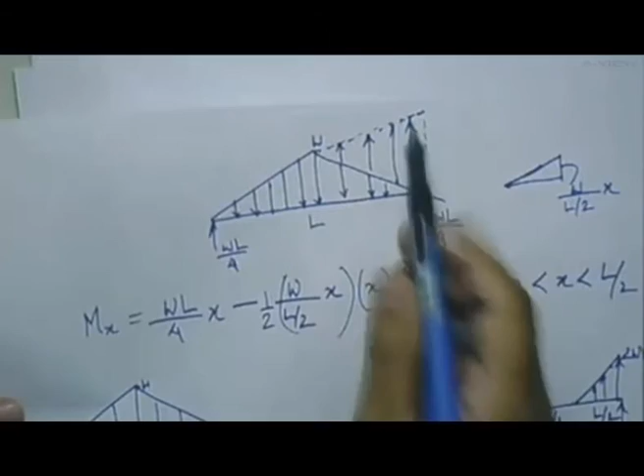Only this much, the first and second term, would have defined the moment function of the beam. Because we have a change in the slope of the uniformly changing load of the beam, that is why we are bringing in this last term here, which has a singularity function.

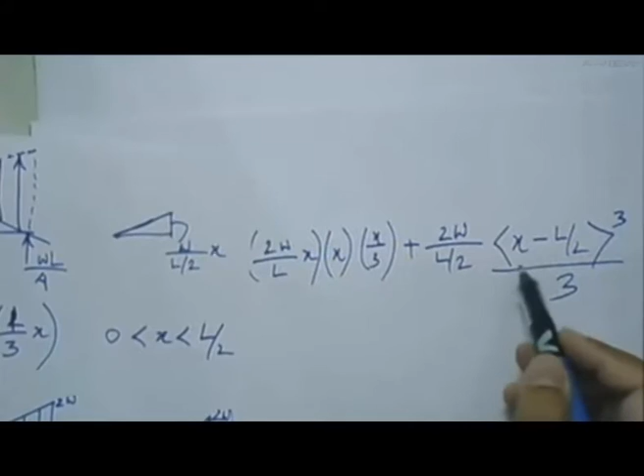So once you have the moment equation of this beam using that singularity function, and it is a single equation, the rest of the steps are similar to what I have shown. You write d2v/dx squared equals mx over EI, and then you perform double integration to solve this.

Now again, if you perform double integration, you will be coming up with two constants of integration. This will give you v equals some terms in expressions in x, plus c1x plus c2. These are the two constants of integration, and you will again be using the boundary conditions.

So in this case, for the beam, the boundary condition would be: at x equal to 0, the deflection would be 0, v is 0. At x equal to L, again deflection is 0, v is equal to 0. So these are the two boundary conditions you will be using to solve this beam.

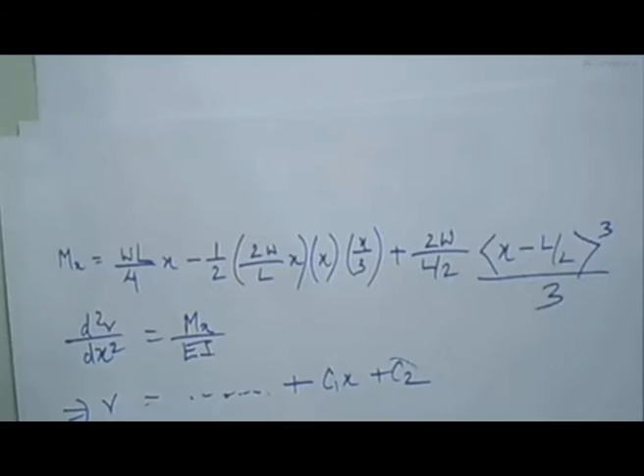So once again, since you have the moment function using the singularity function, the rest of the procedure should be easy to solve. So once again, I encourage you to solve this assignment problem as well, which is on Macaulay's method.

So these two problems, the first and the second problem that you have in the assignment, you should be able to solve after today's lecture. The first one you solve by the double integration method, and I have given you hints about how to solve it and what boundary conditions to use. The second is by Macaulay's method, and once you write the moment function of the beam using the singularity function, you should be able to solve it, because the boundary conditions are also simple.

So if you have any doubts about any of these two problems, you can ask me now, and otherwise I once again request you to solve these two problems after class today.

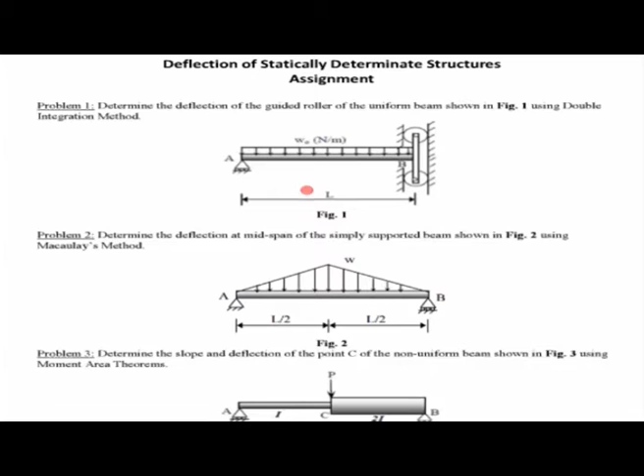Okay, I have a question. What is the problem with complicated loads and supports? What are the methods available to find deflection in complicated beams? What is the theory behind the software available to find deflections in complicated loads or beams?

Now, the first question is, what is the problem with complicated loads and supports? When I said complicated loads and supports, I basically meant beams which have loadings due to other factors like thermal loads. Because of these thermal loadings, the elastic beam theory is not applicable for these beams, so you cannot use these methods for solving beams with complicated loads using elastic beam theory.

Now, what are the methods? The last method, the energy method, which I will be covering in this topic, can be used to some extent to find deflections due to these thermal loads or due to fabrication errors.

What is the theory behind the software available to find deflections in complicated loads? Different commercial software have different theories. Energy methods is one of the theories used to solve for deflections due to thermal loadings or fabrication errors. There might be other methods which are applicable, so it is always advisable to go through the manuals of these software and check for the methods.